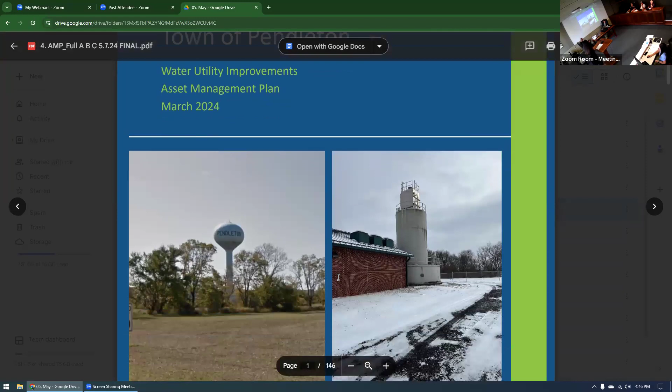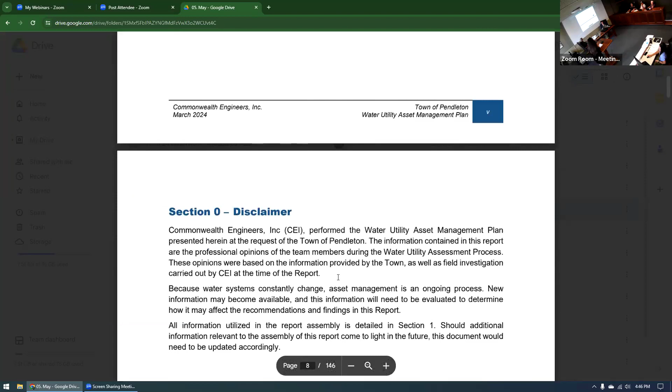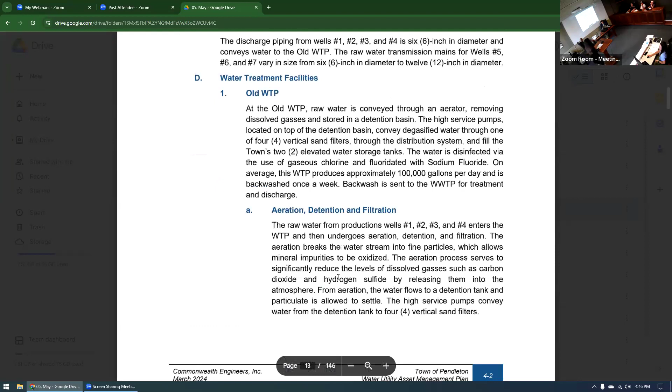If you want to scroll through it a little bit, I'll show you in detail. I think this is part A, but it's a very detailed report of how they take a look at all of our infrastructure for our water utilities. It gives us a great description of the condition, the age, the risk of failure, and expected replacement costs for each of those infrastructure pieces. It also provides a needs assessment for replacement, recommended improvements, and a maintenance schedule based on those needs.

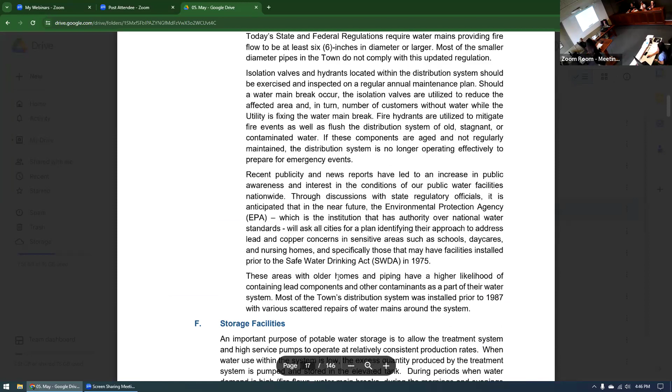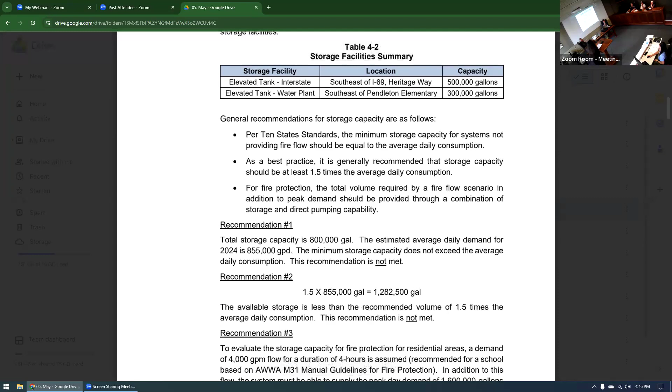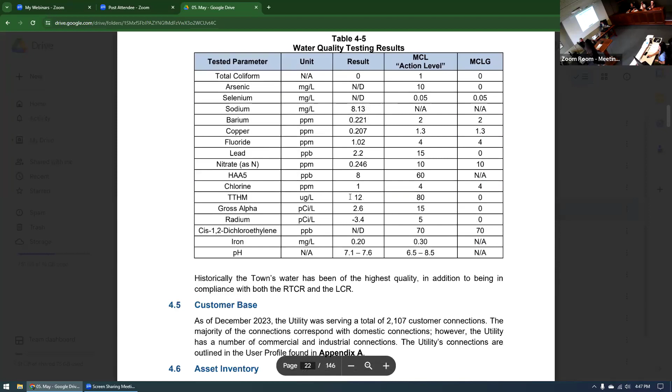Do you have a page number? I don't, I apologize, I should have looked, but there are some grids in there where it breaks down into the facilities. I'd say probably the first 50 pages or so. There's a master sheet that shows all the assets listed like an Excel spreadsheet. Yeah, it's buried in there somewhere, maybe in an appendix. I know where it starts, but that's not too helpful. Just a few more pages. You can double check. I think we're getting close. There it is.

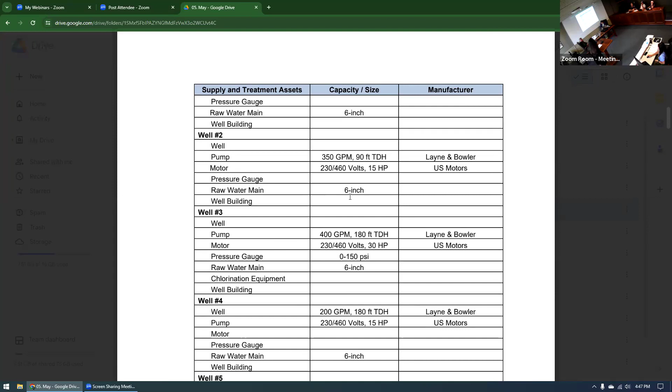It starts breaking down the facilities, their manufacturer, and their capacities and so forth. Then from there, they broke it down in terms of life expectancy and what needed priority for replacement.

In identifying those future improvement projects, I apologize, I wish I would have written down the page on this as well, but it provides a breakdown for the next 20 years of what is anticipated for replacement needs and what those recommendations are. That included select main replacements.

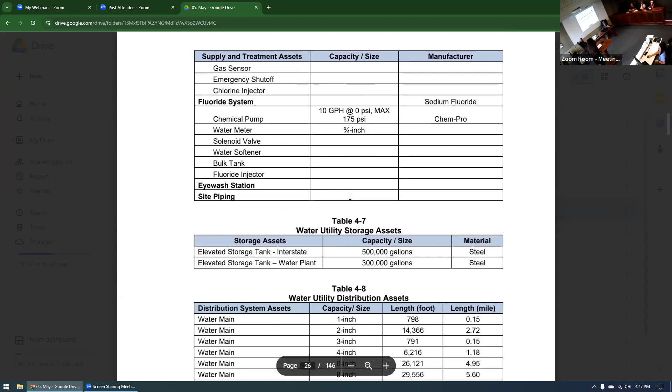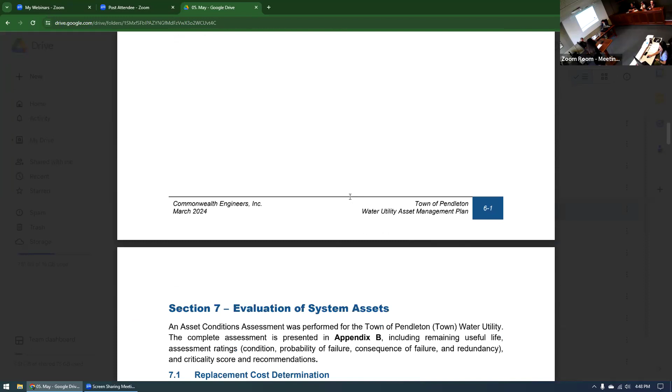Those were identified by our water department supervisor based on his experience in the field. Also included is constructing a new 1.2 million gallon storage tank. We currently have two water storage towers, but we're looking at the need for a third one at some point as our community grows. Lead line replacement is also anticipated in those costs.

Also, doubling the capacity for our water treatment plant number 2. We have the one located by Pendleton Elementary off of East Street, which is what we call the old water treatment plant. We're looking at needs for decommissioning that, or at least improving that facility at some point in the future, as well as improving and adding on to the new treatment plant out off of 900 South. Is that right? Yeah.

And then, of course, we'll have those conversations at some point about where we anticipate the best place for a third water treatment plant, maybe perhaps out west as the growth is heading in that direction. But that's for a later date. They've definitely identified the need to double plant number 2's capacity, and then potentially construct a third water treatment plant.

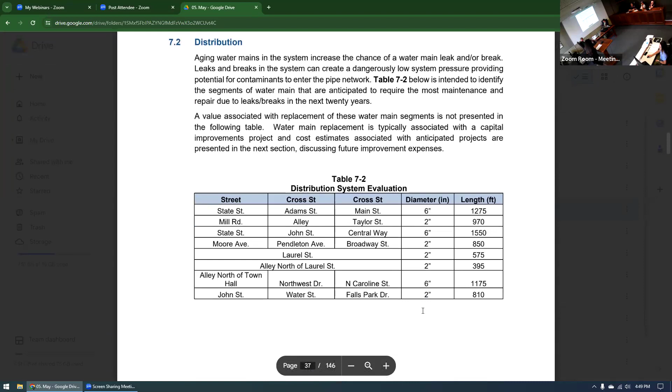So on this 20-year lookout, looking at monthly reports of operation, testing results, capacity, and needs, they were looking at about $65 million for all those cost replacements.

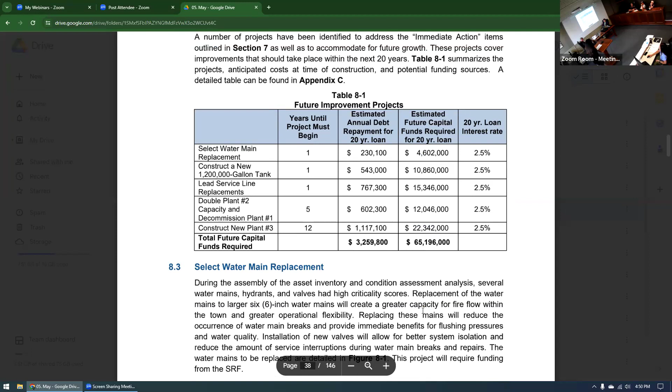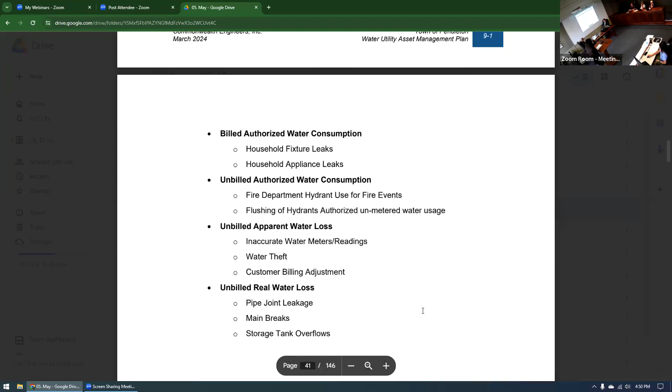That brings us to part 2. Part 2 goes over the managerial section, our operations and processes that we have internally for our water department utility. This includes current operator certifications and licenses. It breaks down from our supervisor to his existing staff members and what licenses they have.

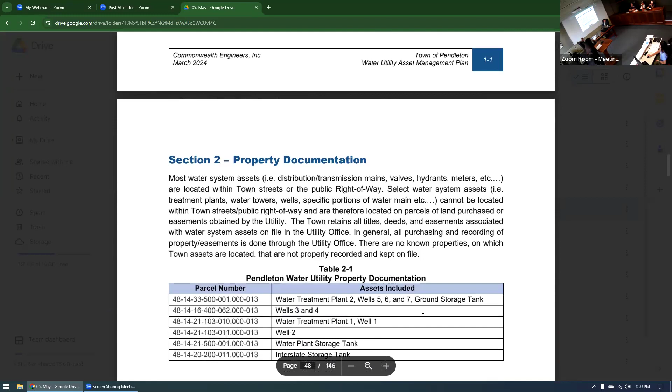It also goes into a description of our water utility system, including our parcel identification numbers for the water utility infrastructure, and operating plans, which include job descriptions, duties, manuals, and organizational charts. From there, it goes into written procedures.

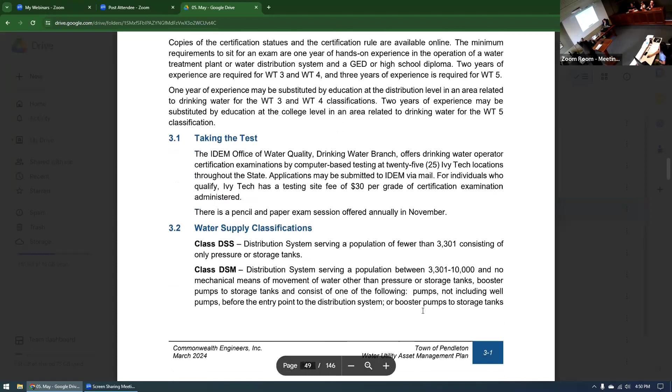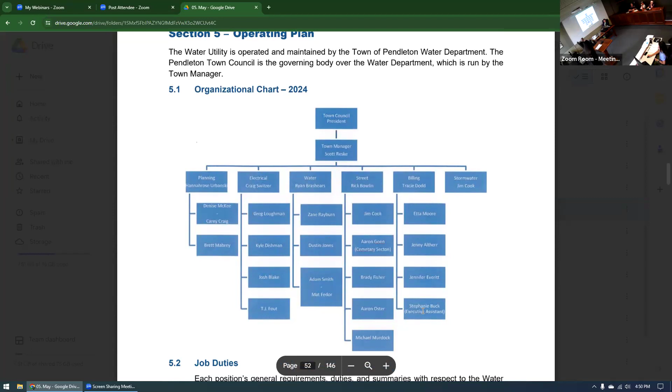Written procedures breaks down a bit later on, Stephanie, covering trainings, our processes, what type of training topics we typically have staff engage in, billing procedures, purchasing and authority processes, customer and payment processes, ordinances, and also meter replacements and record keeping.

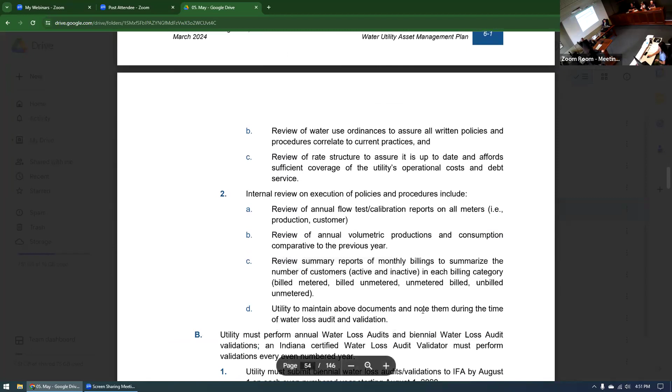So that wraps up the purpose of part 2.

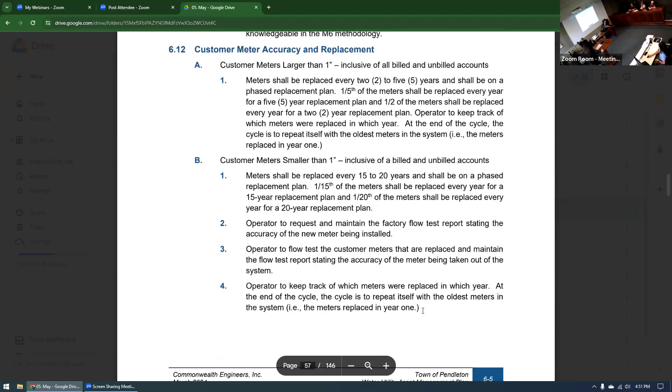Part 3 was provided by Reedy Financial. They are financial advisors for the town of Pendleton. In that third section, what they did is take the first section and basically did a verification as far as what we'd be looking at in costs, and then a capital plan.

And then based on those expenses and anticipated expenses, and then taking a look at what our current rate is on our base usage rate, to what could be needed and necessary to be increased over time to accommodate those needs for replacement, maintenance, and improvements.

So looking at, I think it was somewhere around $39 per month, up to about mid-range at $62, and to the high end with other options at $73 a month. So again, that was more of a long-term analysis looking at what our water utility needs are anticipated to be in 20 years.

What is that percentage of increase? About 30 to 40%, that's the average increase. The 40 is the average, per month. Yeah, that was the base, 50%.

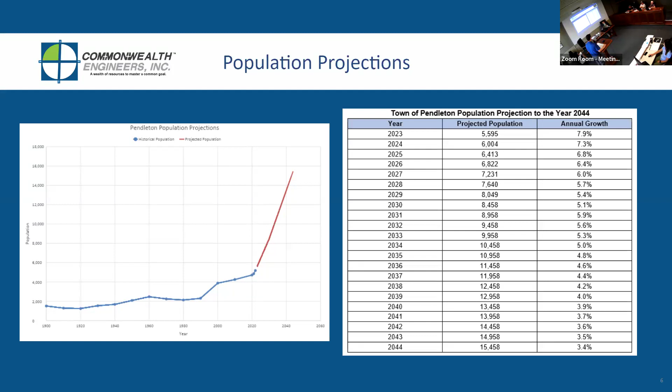The next section looks at your existing facilities. Again, we look at the history of your system, and the AMP that Denise mentioned also talks about that. We describe your existing facilities - supply source, wells, treatment, storage, distribution system and service lines. We look at it all, including the condition through physical review, having been to the site and looked at them, as well as desktop data.

Then we look at your current production, the demand you're currently treating at your water treatment plants versus customer demand right now, and then we look at the financial status of your existing facilities.

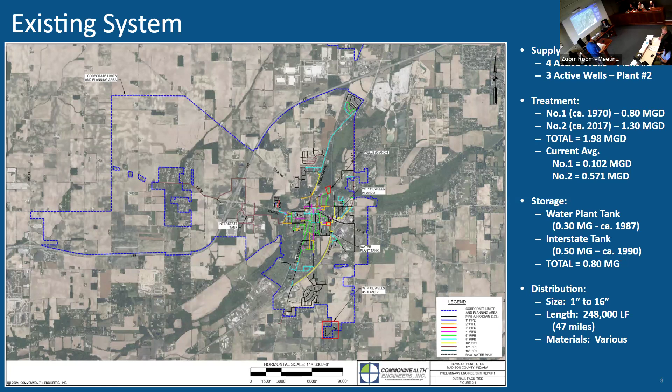As far as the purpose of the project, again, we're looking at the health, sanitation, and security aspects of your system to make sure it's meeting code compliance over the 20-year period.

Aging and deficient infrastructure - what are the needs? Like I mentioned, you have your plants. Your old plant is 50 years old, and you have other aging infrastructure like water distribution lines.

And then we also look at the growth projections - what can we see over the next 20 years? This should jive with that population projection I mentioned in an earlier slide. So we look at several sources when we considered the reasonable growth, which is going to come up in another slide.

We can use Stats Indiana's census data and projections, and historical data available online. We also met with the town - Scott and Denise and Ryan and other town representatives gave us information on what they anticipate the growth could be.

We also looked at two prior studies, both done in 2021 - one being an impact fee plan, and the other being your I-69 interchange master plan, where they also project what growth might occur and where.

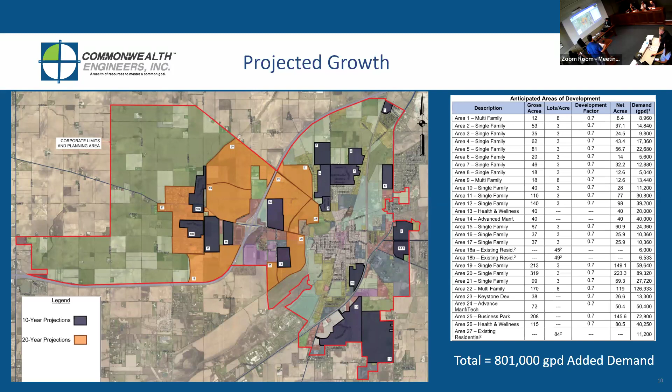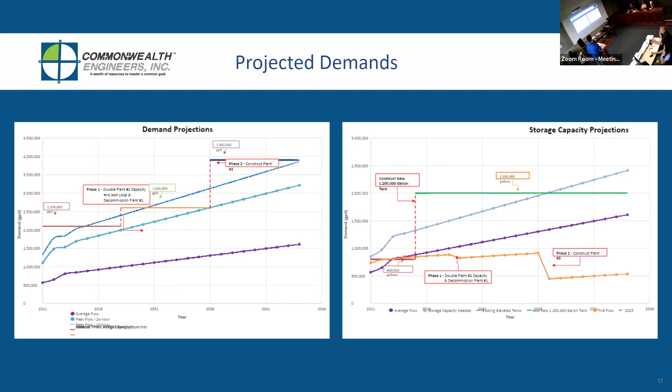Section 4, the alternatives considered. So we looked at, again, many aspects of your system: distribution system, service line, storage, chemical feed, and the backwash at water plant 2. We got a lot of this information from Ryan, ultimately to get feedback on how the system performs.

So for the distribution system, every alternative we look at is required by SRF to have the no action option. In other words, you don't do anything, just keep the status quo and see how it takes you. Obviously, most of those get rolled out pretty quickly because project needs dictate. As infrastructure starts failing, you need to do something with it. So for the distribution system, we looked at replacing all your lines less than 4 inches in diameter versus replacing all your lines less than 6 inches in diameter. The purpose of that is to try to, again, give you as much fire flow demand capabilities as you can.

The state of Indiana requires anything that needs fire flow to be at least 6 inches in diameter or greater. Again, you have a lot of parts of your system that are still less than 6 inches in diameter. While they may be able to get some fire flow, that's not the ideal situation.

So we looked at a couple of alternatives to replace mains, a wholesale approach. And then we also did a targeted water main replacement of just areas that Ryan gave us anecdotally, or were known to be old in your system, had broken down, had leaks, repairs, things like that. Trianne will go over in more detail where those areas are at.

On the service lines, again, we looked at your lead service line work and we broke up all the alternatives and just grouped them in together in bulk: 25%, 50%, 75%, 100% replacements. And the cost obviously goes up dramatically as you do that.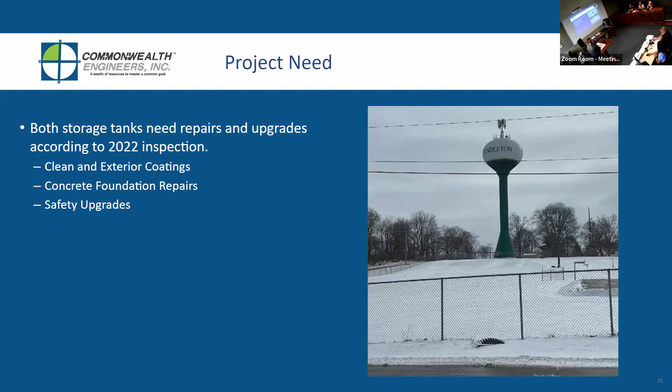And then finally we have the backwash at treatment plant 2. The way it's backwashing right now isn't functioning very well, so we've looked into how we can tie that into the sewer system rather than, as it does now, running back through the plant and hitting the filters with iron. The water quality goes down as the backwash water goes back through the plant, so they have to backwash more frequently. It's just not a very efficient system.

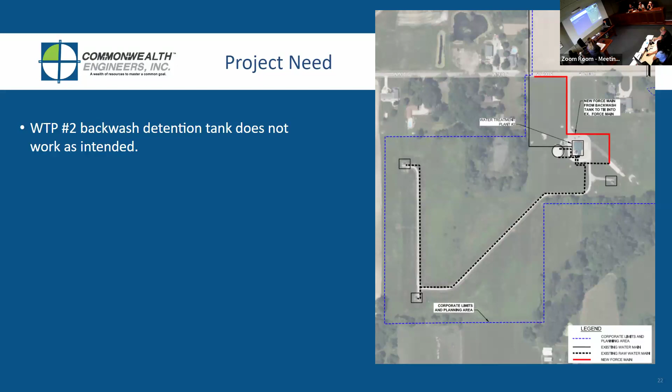So from that we put together a recommended project based on these specific needs. I know we outlined some more needs that are a longer scope — the next 20 years, next 5, next 10 years — but these are just the needs we've identified as needing done soon, in this project cycle.

The recommended project includes replacing 50% of the lead service lines — just the service lines that are the highest priority on that map I had up there. The 50% is kind of a placeholder; really the amount would be whatever SRF funding gives you. So we're asking for replacing 50% of these lines. They may say, here's $2 million, you can replace however much you can with that.

Targeted water main replacement — again, those are the areas identified by Ryan, kind of hard to see on this figure but denoted in red here. Adding isolation valves to the system — that would just be adding more valves so there's more flexibility in what can be isolated in the system.

Performing the storage tank repairs — again, that's just the necessary rehab based on the Dixon inspections. Separating chlorine and fluoride at treatment plant 1, and also adding the scrubbers. And then rerouting the backwash to the sewer so we don't have that inefficient flow through the system.

The future projects we discussed include adding additional storage, most likely west of 69 — if there's going to be a lot of growth over there, we want something to feed those people. Adding additional water supply, likely down by treatment plant 2. And then treatment plant 2 capacity expansion.

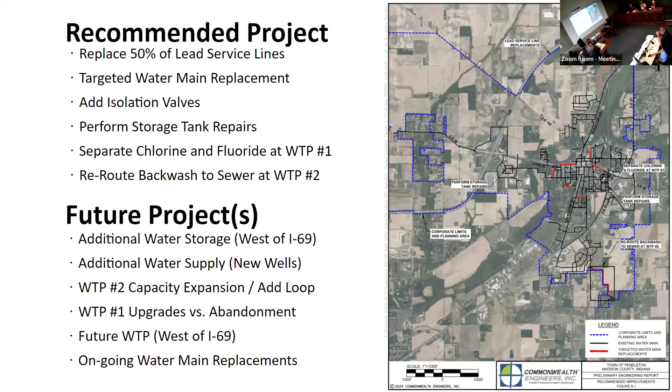So here is the project costs that we have outlined. The BABA contingency that we have here is 10% of the total project cost. Basically, that's Build America, Buy America, or Buy America, Build America—one of those two. Basically, most of the materials in the project will have to be produced in the United States, so that adds a bit of cost. Some of those materials aren't produced in the United States right now, so it can be really expensive to get them.

That comes out to total project costs of just over $13 million, including non-construction costs, which would be design, legal fees, bond bank, and all the random miscellaneous things like permits.

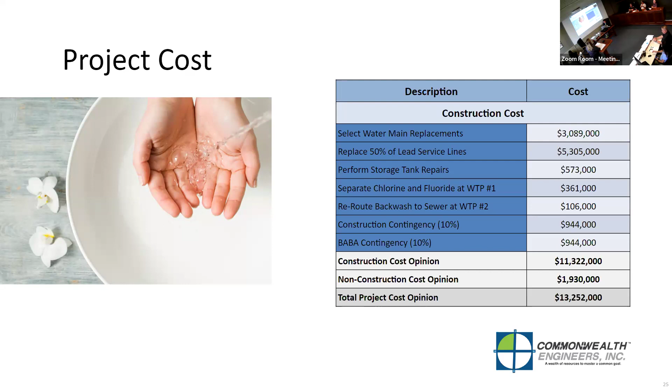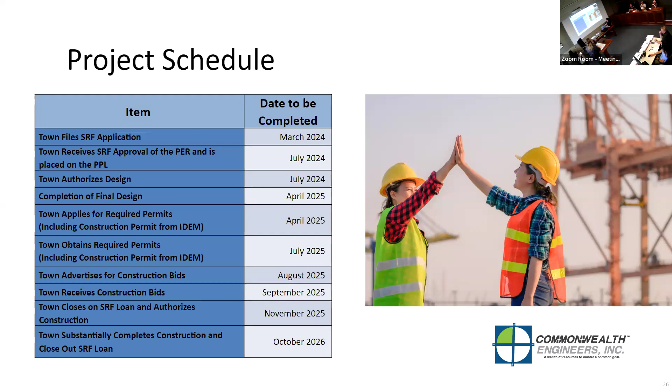And then the project schedule here—I don't want to keep with this too long—but the PPL should be announced July 1st, 2024, and that'll tell us how the town ranks against other projects and kind of what type of funding package you might be able to get. After that is announced, we can start design on the project. You have to move now.

And then permits—we anticipate there might be about 4 permits for this project. They're pretty typical: the IDEM construction permit, construction stormwater general permit. Any work we're doing near an INDOT road will need a right-of-way permit, and then a county right-of-way permit for county roads.

That $5 million grant is just sort of a semi-random placeholder figure.

So, are there any questions from anybody? I've already spent two years on this. Don't think so. You guys got any questions?